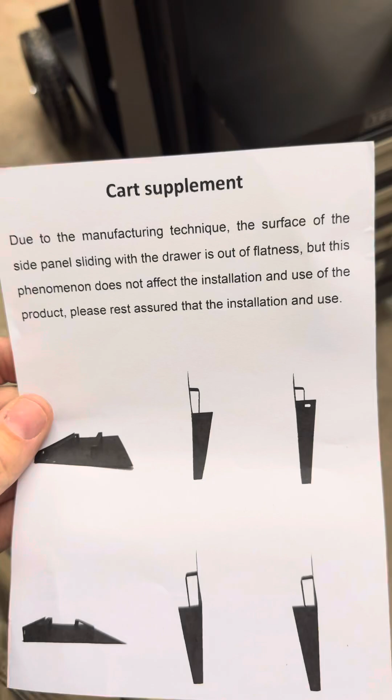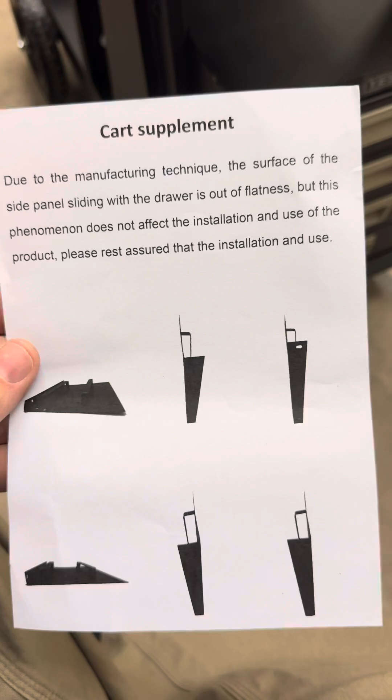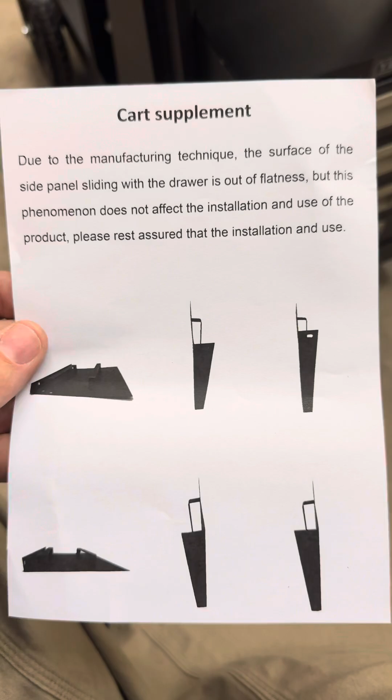Now, it obviously comes with an operator's manual, but there's a couple of things in here it does not discuss. They're minor, but I'll talk about that too. It came with this, which was a little concerning and very not well written. But I did not have any issues with whatever it's trying to tell us here. It says something about it being out of flatness on the side panel or something, so I didn't have any issues with this. It's not well written. Probably not something that you really need to worry about, at least in my experience.

So with that said, I unboxed it. That took a little while. Everything was wrapped and packaged well. And once I got everything laid out, assembly went fairly smooth.

I'll talk to you about a couple of issues, and we'll just go front to back as far as the assembly timeline goes. So first part of assembly, this bottom piece is the first one you want to locate. You want to locate the axle rod that goes across at the back, the two tires, one on each side. There's a washer and then a cotter pin on each side. So first part of assembly, take the bottom piece, insert the axle rod, put a tire on each side, put a washer on each side, and a cotter pin on the outside.

Easy enough. There are two swiveling casters that go on the front. They're held on by 4 screws each. All the screws, all the nuts, hex nuts, and washers and lock washers are all the same size throughout the assembly. So that's good, you don't have to worry about where this washer or screw goes. Very cool that everything uses the same size hardware throughout. I think that's a great simple way to have this thing set up, so good for them for keeping that simple.

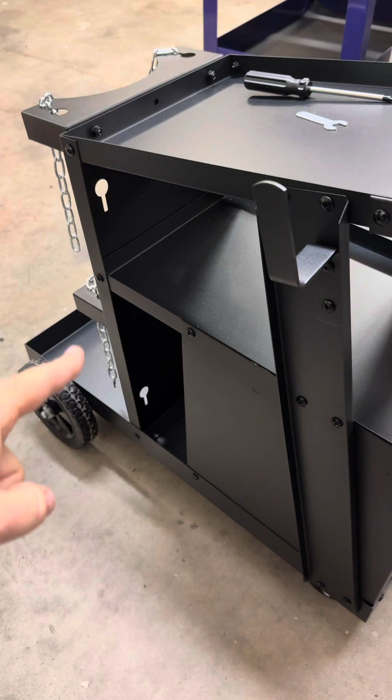Once you've got this middle tray in and the vertical side pieces on, the next part is to put in this top tray, and at the same time put in this little bracket. These two brackets on the back look identical to me - I don't think they differentiate in any way. So this one you can put on later, but this one needs to be sandwiched in with these screws, hex nuts, and lock washers on the back. That needs to be sandwiched in and attached.

There is an extra piece, which is very nice, and it sturdies it up. I don't know if they had to do this, but it's nice, and I'll talk about it in a bit. They have these extra screws in the corner.

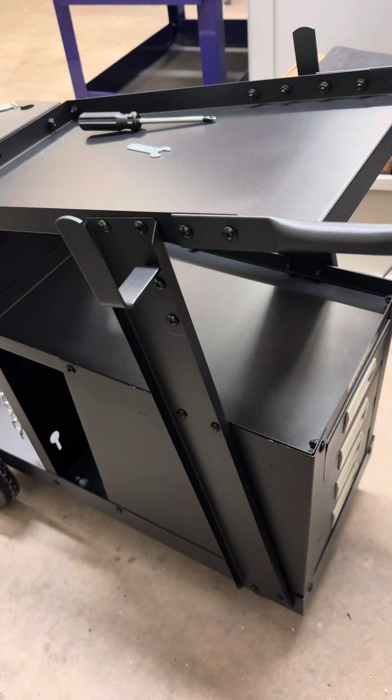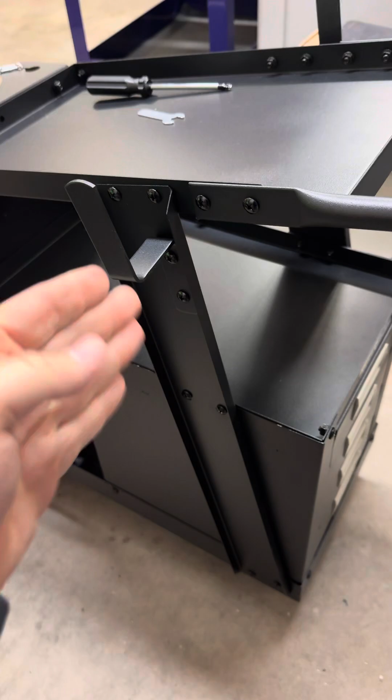Then it's really your choice, but I think they recommend putting your little hooks on here that hold your ground wires, leads, stuff like that. There's one on each side, 2 screws on each side. It really doesn't matter whether you do these or the handle next, because nothing else attaches to it.

Once you've got all of that done, at this point you should be able to get everything lined up, squared up, and tighten everything down. Again, these aren't in place at the time, so you can still access everything that's down there pretty easily.

From there, it doesn't really matter when you put this other bottle holder bracket on, because it's just got 2 screws that go through and hold it on. And then I put the chains on. Finally, I put in these drawers, and they just slide in - just line them up and push them in, and they'll slide in.

There's no liner on any of the shelves or drawers on this shelf or the top. There's no rubber mats or anything - it's just painted metal. There's no rubber handle on this front handle. Overall, I feel like once it's assembled and everything's tightened down, because of the attention to detail they had to add these extra screws in a couple of spots, like on the front, it's really a sturdy cart.

I'm pretty happy with the quality in that regard, but there's a couple of things you need to notice, and just understand you're kind of getting Chinese quality stuff. I would put this on par probably with Harbor Freight - some of the Harbor Freight stuff can be nicer than this. I haven't really looked at the welding cart they have, because I think theirs is open. They may have one like this that has the drawers. That's a single welder cart, but I wanted these drawers, and I'm happy that I got this one. But there are telltale signs that it's still a cheap Chinese product.

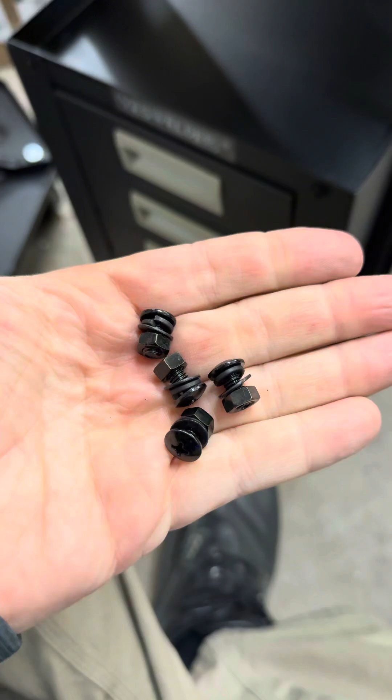It did have, I didn't miss any spots, other than it does have an extra hole back here, but there's not a hole drilled in that bottle holder. So I can't really say for sure why they put that there.

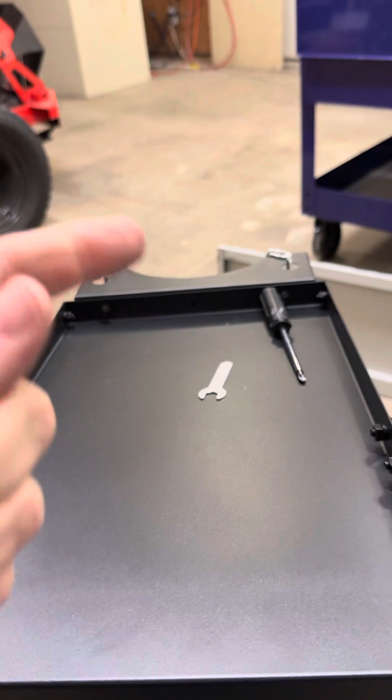But anyway, the other bottle holder bracket is the same way. There's no hole, so those brackets are the same. And it did come with a little extra hardware, so I guess it's got 4 extra sets of screws and hex nuts and washers.

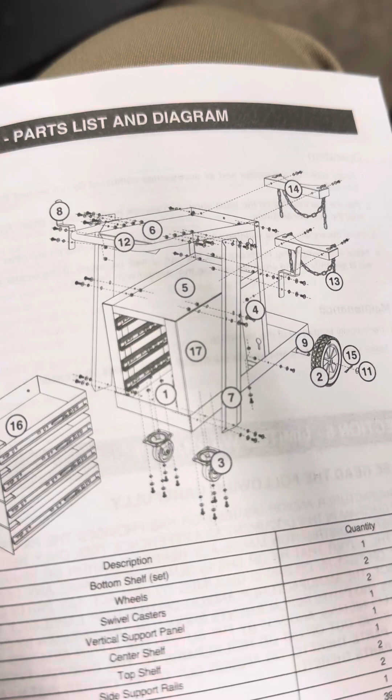The pan head screws that they use are very wide head, have a large lip, so I don't really use the washers on that side. The assembly instructions and the exploded view in the book may show it a different way than the way I assembled it. I did not use the washers on the screw side because the screw has a wide head.

And I wanted it to be as flush as possible. To me, that's a cleaner install and it's functional. So I put my stuff on the inside, and I did put the lock washers up against the flat surface of the metal. And then I put the washer on the outside of that, and then the hex nut.

And the reason I did that is so that I would get the friction of the lock washer up against this metal, and then I could use that flat washer as kind of a higher surface area against that hex nut. I don't know if that makes sense to other people, but that's how I, in my mind, made logical sense of it.

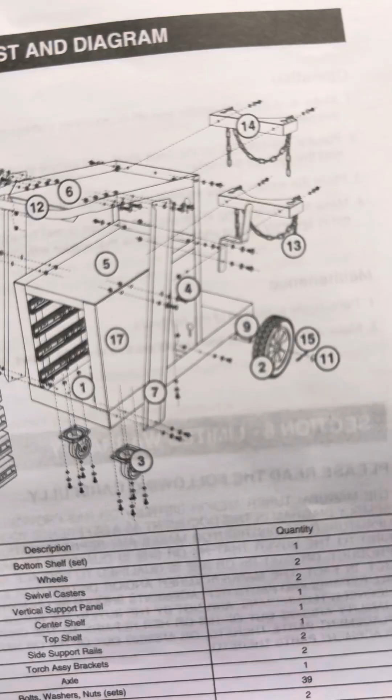And again, it may differ from what they show here. I know there's a couple of parts that they show done differently, but I think it's a lot cleaner this way, and I did not see the benefit or the reasoning behind putting it on the outside. I think it's a lot more flush and clean looking, and functionality wise, it did make sense.

Last thing I would say is it did come with a couple of tools in the box, and for the most part, this is all you'll need for assembly. It comes with a cheap wrench, and I have tons of wrenches and sockets and ratchets I could have put this together with, but I wanted to see how well and easy this went together with this stuff.

Overall, pretty easy. I could have probably cut about 10 to 15 minutes off of assembly had I used either power tools or just better hand tools. But like I said, I wanted to see how long it took. So I think it took about 45 minutes to an hour, and I really took my time.

And I had a couple of things that I just kind of learned over putting it together, like everything gets a washer, and I didn't know that at first. So I had a little bit of disassembly, but it was just on the caster part. So I figured that out early on. Just didn't mention it in the instructions.

Usually when you have these, it says screw, washers, and hex nut, but it just said screws and hex nuts, and it didn't really show in that part of the book, I don't think, the assembly. So later on, I'm like, man, we've got a lot of washers. I wonder if I'm supposed to have used those. And I looked forward and I saw that exploded view, and I was like, oh yeah, they got enough for all of it.

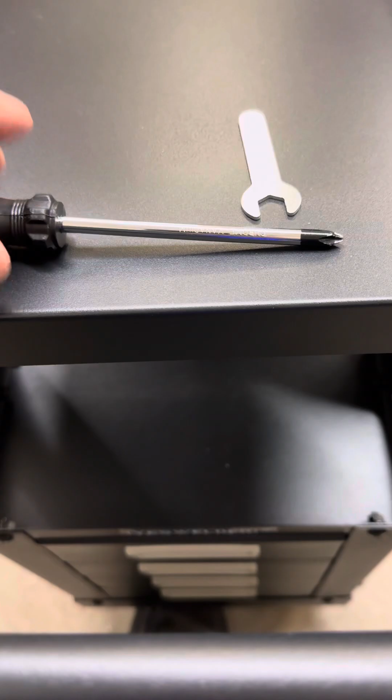So it came with that little cheap wrench, and it came with this actually fairly decent screwdriver. Not the best, not the most comfortable, not Snap-on or anything like that, but it actually is, as you can tell, magnetic tip, which is nice.

Because when you're assembling this stuff and you're doing it alone, which really you want to do it alone, you don't want anyone helping you with this, I promise you. They'll just complicate things and frustrate you. So just do it yourself and use this, and it helps hold your screw in place because it is magnetic tip, and it's good enough to get through this.

It's not gonna do many other jobs beyond this. I tried to hold the screw in place and leverage more with this when I'm using these cheaper tools, just so they'll not strip, because they're gonna wanna strip if you really wanna torque on this cheap screwdriver too much. But overall, I was actually pretty impressed that they included this.

It would have been nicer, a couple of little things to note. It would have been nicer if they would have included a flange locking hex nut with a nylon insert. Would have done better, but they did that, I'm sure, for budgetary economical purposes to keep this thing fairly cheap.

But it would have done the same thing. It would have been cleaner and better if they did that, in my opinion. They would have accomplished the same thing, and it wouldn't want to back out. It would have the flange, which would give you better surface area. I think it would have been better because you wouldn't have this, it's kind of uglier this way, and it's kind of a big sandwich, in my opinion. But you don't have to critique it too much. I mean, this thing's pretty inexpensive, so that would have been helpful.

I think that YesWelder is an up and coming brand. I've got a couple of their welders. Overall, I would say I'm pretty happy with them. I did get one that was dead on arrival, and they replaced it under warranty and did not ask me to send it back. This is, considering, I think their most expensive welder.

It's a Firstess CT 2050. I got it on the Kickstarter, kept it boxed up, got busy, did not have it hooked up at all for a very long time. It was brand new in box, hooked it up, would not stick weld at all. And I got a hold of their warranty department, I think it's care@yeswelder.com. After a little bit of back and forth, I provided the serial number and some other information for them. I actually had to send in a video of what it was doing.

There was quite a few emails back and forth. They were wavering a little bit on their warranty. It's a 3-year warranty on that product. I had it for a little over 2 years when I hooked it up for the first time, and because the Kickstarter had a 2-year warranty instead of the 3-year that they've gone to now, they were giving me a little bit of a hard time, but I will give it to them, they stepped up. They sent me a replacement at no charge, did not ask for the other welder back. Handled their stuff pretty well.